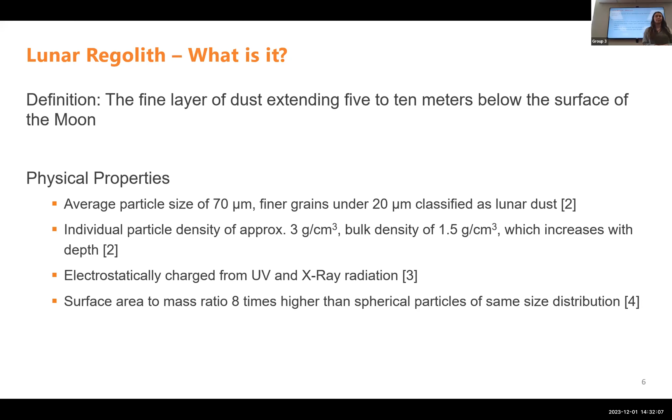There's many harms for the lunar dust and the lunar regolith that can be split into both human health hazards and mission and mechanical hazards. The human health hazards include watery eyes, decreased vision, cough and throat irritation, lunar dust embedded in the lungs, infections, heart failure, COPD, and lung cancer.

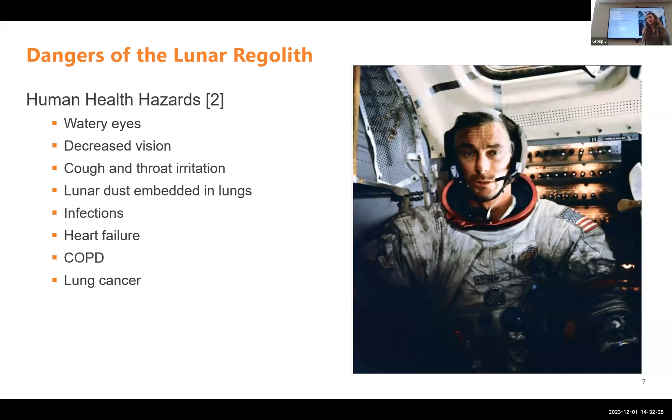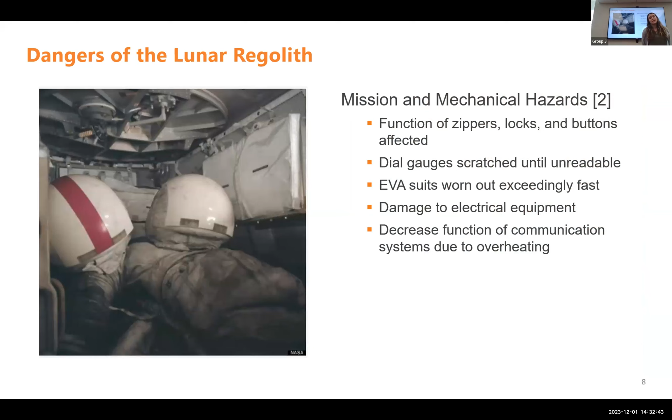The mission and mechanical hazards include functions of zippers, locks, buttons, all being affected, dial gauges scratched until unreadable, EVA suits worn out exceedingly fast, damage to electrical equipment, and decreased function of the communication systems due to overheating.

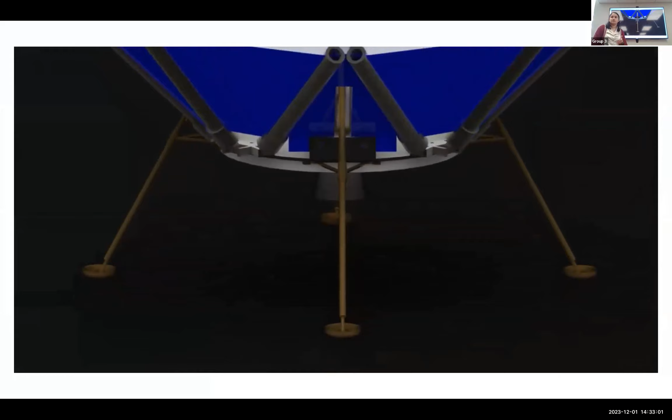So now we're going to go into our actual design. So this is presenting the dust shield integration system that we created, which is set to be, as we said, attached to the Blue Moon Lander. Upon expansion of the system, the shield is going to deter dust from falling on the lander and possibly causing extensive damages.

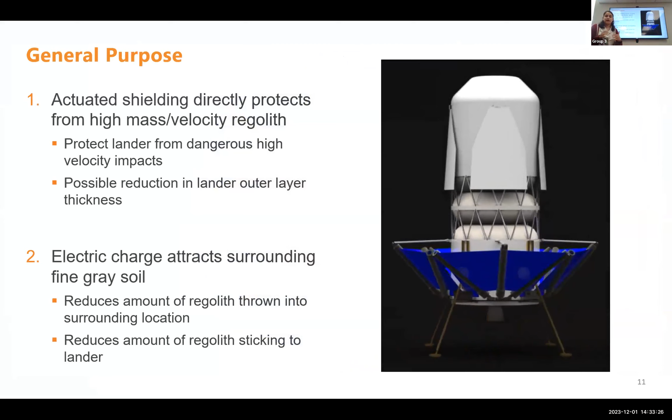So the shielding itself, which is indicated by the blue material, is made of carbon nanotubes that are going to protect the lunar lander from high velocity impacts from regolith. So likely things like rocks and smaller items.

So additionally, the electric charge in the electrodynamic shield, which is integrated within the system, is going to attract surrounding dust, which is going to reduce the amount of regolith thrown around on the landing site, which is going to help reduce contamination for the samples that are going to be collected later on.

Here we have a further breakdown of the different components. It's going to feature 4 linear actuators along with a series of beams and brackets, and the electrodynamic dust shield, or EDS as you'll hear us referring to it, which is integrated within the blue fabric.

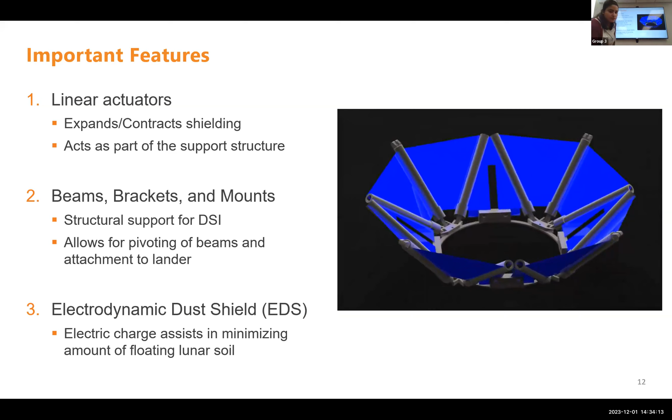And here, once again, is a further breakdown. We have the EDS fabric in blue, which is, like we said, the carbon fiber nanotubing netting, which has copper wiring embedded throughout. It's connected to the beams, and when the DSI contracts, it's going to fold up against the lander.

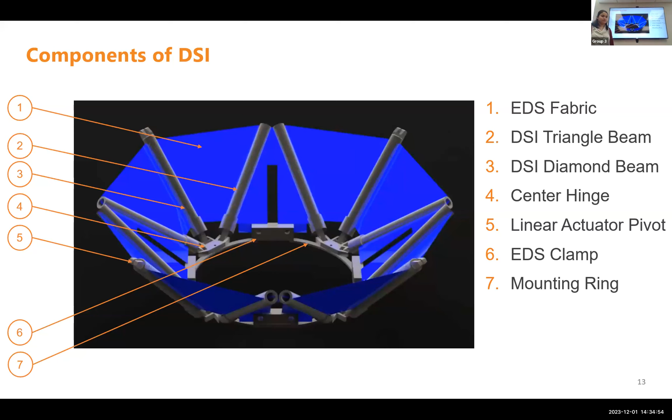We also have the different beams indicated by 2 and 3, which are the triangle beams and the diamond beams, along with these center hinges that will connect it to the main structure. We also have, indicated by number 5, the pivots where the linear actuators will be attached, along with several clamps that are going to hold onto the fabric to allow it to contract and expand.

So starting with the triangle and diamond arms, as Elizabeth said, these are our main structural members, and they are made of an aerospace grade titanium alloy that is known for being very light while still remaining very strong. And it was very important to have a very light material because of how large these beams are, being approximately 5.5 and 7 meters long, and with a 60 centimeter outer diameter and a 3 centimeter wall thickness.

And then next we have the linear actuator clevis mounts and tube couplings, which allow the arms to connect to the linear actuators and the hinge mount at the bottom. And they are made of a high strength steel alloy. So even though the steel is quite a bit heavier than other materials, it is very strong. And in our structural analysis, which we'll show later, we found that these were critical points of failure and potential points of failure in our design. So we went with steel, even though it was a bit heavier.

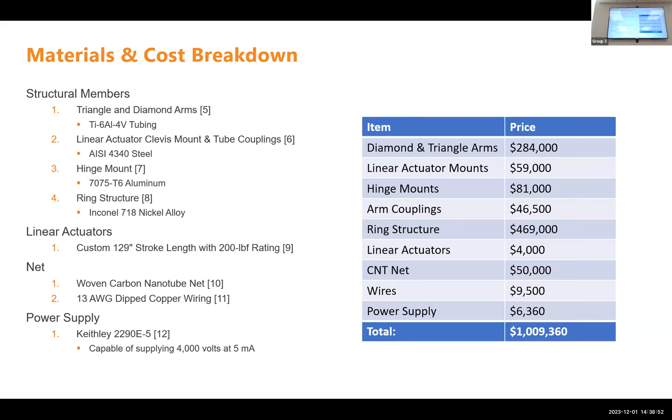Hi, my name is Benjamin Smith, and I'm going to walk us through a contextualization of our design. So first off, why did we choose the Blue Moon HLS? The primary reason for that is that it has a more typical lander design compared to our other option for this challenge, which was Starship. And our team felt that by choosing Blue Moon, we would have a much larger history of data to comb through, primarily the Apollo missions. And additionally, by making our design for a more typical lander design, it could be used on future landers if developed and improved upon.

And the second thing to contextualize is, why do we go with a combination of systems? And so when our team started our initial research, we quickly figured out that in order to have a more permanent solution for dealing with lunar regolith, it would likely require extra missions and a significantly higher cost in order to achieve that. And so we went with something that's more modifiable, something that can be attached to an already existing lander and be sent up there. And obviously it's more of a temporary solution, but we felt that that fit better within the parameters of the challenge itself.

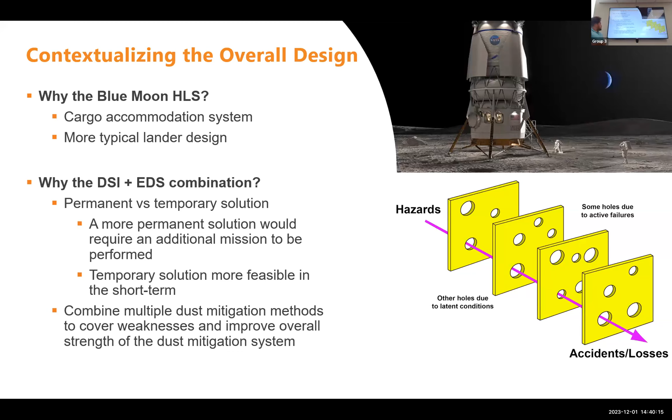And so why do we have this big shield here? Primarily the shield is an active method of dust mitigation. By deploying, it will help deflect dust that runs up and hits it. And additionally, we realized that with the shield, we won't have to worry about any flight characteristics being affected, due to the fact that we'll be in a vacuum when the lander is landing and ascending.

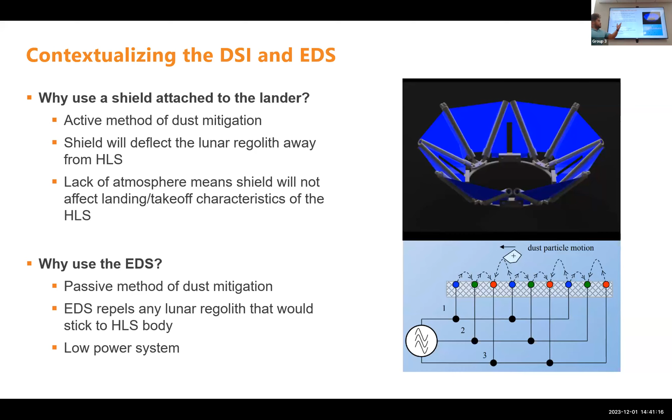And why did we choose the EDS? As a passive method of dust mitigation, we felt it was important to include, so that any dust that's not deflected by the shield would be able to be repelled off the surface of the lander itself. And additionally, it's a low power system, so it would not cause a massive strain on the HLS's current power setup. And we combine these systems together to cover their weaknesses and to improve their strengths.

Hi everyone, I'm Paul, and I'll be going over the astrodynamics of our mission. Our astrodynamics sequence is a simplified version of the one that will happen for the Artemis 3 mission in 2025. The sequence comprises 4 parts: the initial low Earth orbit around the Earth as a parking orbit, a translunar burn, an insertion orbit to enter the moon's gravity field, and then a rendezvous sequence to catch up with the HLS system that is already orbiting the moon.

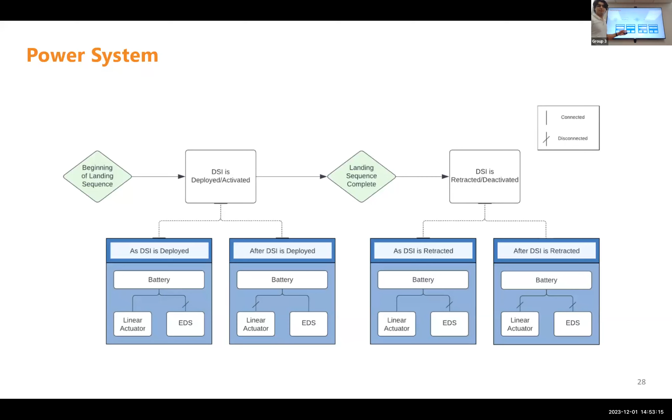To implement this PID controller with our linear actuators, we've chosen to go with the manual tuning method. It's intuitive and well suited for our relatively simple linear actuator mechanism. So first, we'll start by increasing our proportional gain for a fast rise time and controlled overshoot. And after that, we'll adjust our derivative gain to minimize overshoot and then our integral gain to minimize steady state error.

So moving specifically to our linear actuators, it's important to note that there's no computed torque control as these operate in a two-stage manner. And velocity inputs are unnecessary due to their simplicity. So instead, we'll rely solely on the encoder within the linear actuators for feedback control and utilize the position of the linear actuator mechanism.

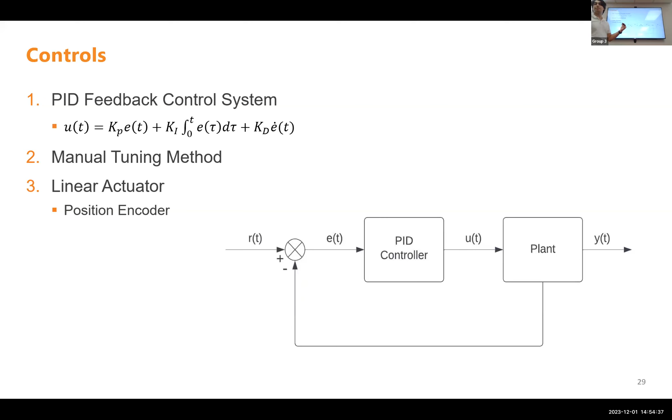All right, so I'm Rodrigo Pazanotto, and I'll be talking about the structural and thermal analysis of our design. So for the structural analysis, we decided to separate the system into three different critical components: the linear actuator, the shield arm hinge system, and also the mounting ring hinge system. Right here is the linear actuator, the shield arm, and the ring around.

And for the analysis, we decided to focus on the main concerns of our structural design and the material selection and the attachment methods. It's also good to mention that everything was vetted using hand calculations, and the overall factor of safety of all the three subsystems that we separated is around 1.93.

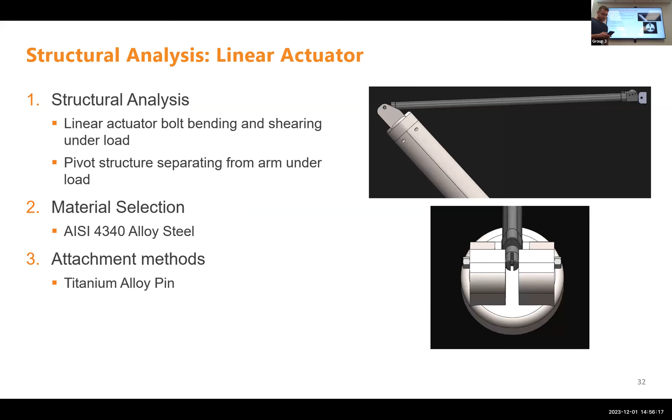But going for the linear actuator right now, our main concern was first the linear actuator bolt bending and shearing under load right here, and the pivot structure separating from the arm. These two brackets right here, as we see, and that's why, as Chase said, we chose a high strength alloy steel, stainless steel, and also we used the titanium alloy pin for this specific mounting bracket system.

What else? Okay, so now going for the shield arm hinge system. So the main concern here was the hinge system brackets breaking off the main hinge system right here. As you can see, we have the different brackets. That was one of our main concerns. The hinge pins, again, just like in the linear actuator, shearing from the weight of the arms, opening and closing, and the arm coupling detaching from the hinge coupling right here as well.

And for that, the material selection, as we said, I wanted to save some weight, and because these pins right here don't suffer as much as in the linear actuators, we're able to use aluminum alloy, and the factor of safety of this specific system is still at 2.4, so it's pretty safe. And for the attachment method, we decided to use plasma welding for those systems, and the titanium alloy pin again for the hinge systems, and the plasma welding just because it minimizes distortion, and it's just better overall when you're dealing with spacecraft components. And now for the mounting ring.

Okay, for the mounting ring, our main concern, since this is the part that's going to be connected to the HLS, is that we need to make sure that it's going to stay there. It's not going to fall off during a landing procedure. That's why we use the nickel alloy Inconel 718 for the material selection. As we said, our main concern is the detachment of the hinge system via the breaking off of the mounting ring and/or the HLS as well. And the attachment method also is the plasma welding.

And he's got another question. Oh, sorry. Just wanna let you know, I'm pulling up the slide that has it attached to the lander just to make that a bit clearer. Yeah.

So while she's trying to find that, we're trying to help protect the lander from any displaced plumage that will be displaced by the engine. And then additionally, having the shield at this angle should have any deflected plumage go up a bit. So if there are any structures nearby, then ideally the plumage won't be hitting it directly. It may just fall on it, which isn't as big of an issue considering the low gravity environment.

It should also be noted that the physical shield itself is meant to block the larger regolith, while the EDS that is integrated within it is what's going to protect from the smaller plume that'll be appearing during the landing. I hope that answered your question. So how effective will this be?

That's a great question. So we designed the shield around the idea. The number we had for the HLS was that it had a base diameter at the bottom here of about 8 meters, and so we wanted to have a protective area go out to 16 meters, so basically double that. That's why the size of the shield is pretty large, and I would say this should be fairly effective. I'm saying that with 50% confidence.

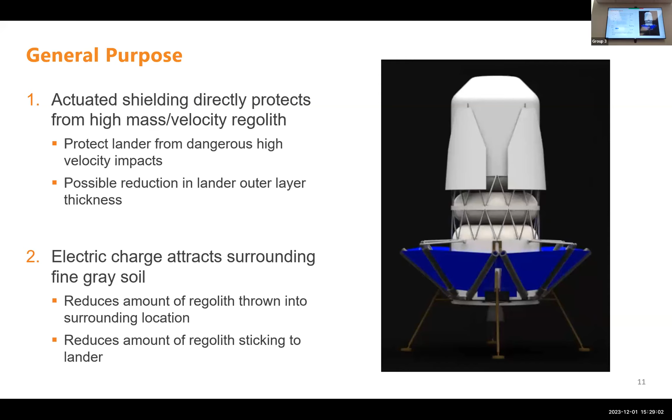Can you swap it, CFD? Yeah, and on top of that, we wanted to give the full picture because the actual point the lander will be coming in from, with regards to its position on the moon, is going to be part of the transfers, and so we may have been a bit too detailed showing the Earth transfers too, but we felt that it was good to be very thorough.

So this CFD was modeling the BE-7 engine, and the CFD graph in the middle is the Mach number, and this bottom one is the velocity. And so this CFD was set up. Oh, okay.

We set up the CFD to simulate a low pressure environment. Typically if you do CFD for a half rocket, doing a half nozzle, since you can just mirror it, you'll have some ambient pressure here, and then you'll get a couple shock diamonds. But since we're in space, we set it up to have a very low ambient pressure, and what we see from the results is that there's no shock diamonds.

Why do we do CFD analysis? We did the CFD analysis to get an idea of the characteristics of the engine exhaust, because those characteristics would impact how the lunar regolith would behave. Yeah, and if you want to.

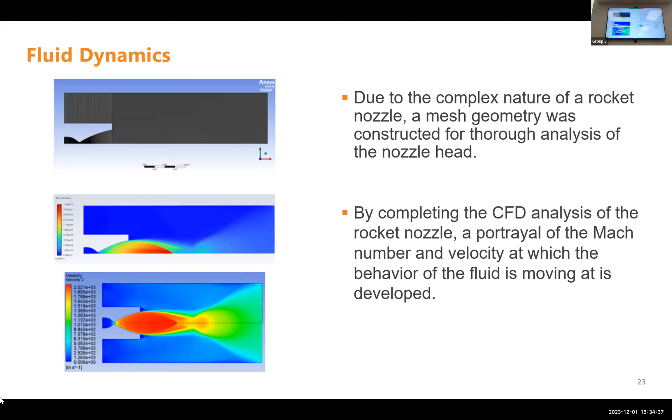I think the propulsion system is something we should have elaborated more on within our slides, but understanding the plume effects, and essentially how far these plume effects would start affecting the lunar regolith, is also what determined at what altitude we would be deploying. It's fair for you to say that. We should have included exactly how it tied in, but essentially understanding the propulsion system, using the CFD and understanding the plume effects, is how we decided the altitude. We just didn't make that clear.

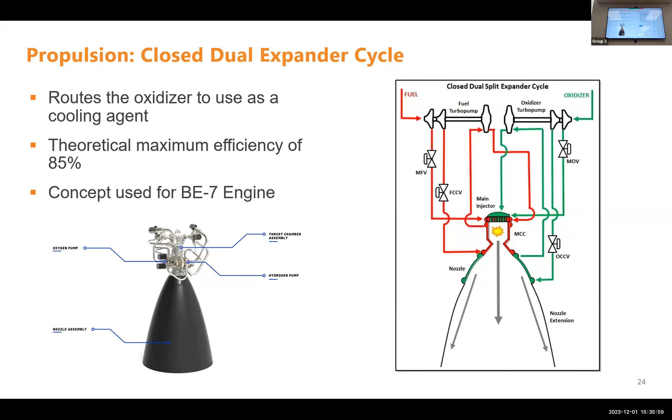Also, on that note, something we should have done as well: we only analyzed one engine for the design, when realistically we should have done the three engine analysis, because that would have been very impactful and helpful for our design. Due to pressure differential, correct. Yeah, when it lands.

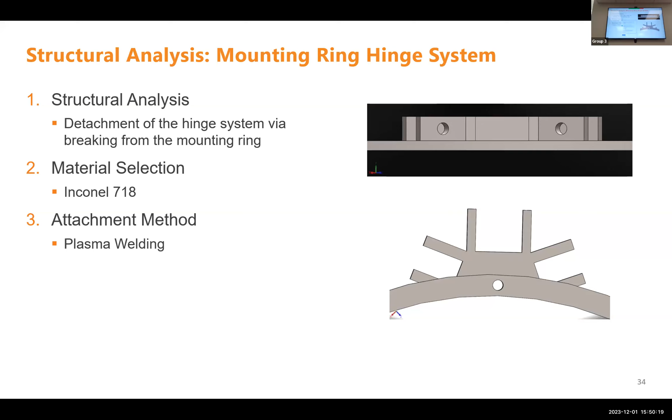No. Wait. Go to that slide. Can you get it? It's this one, sorry. Let's see if I can find it. It should be cited in the PowerPoint. No, in the report. Which report? Body structural. Oh, I have it. Using the attachment methods. What are you?

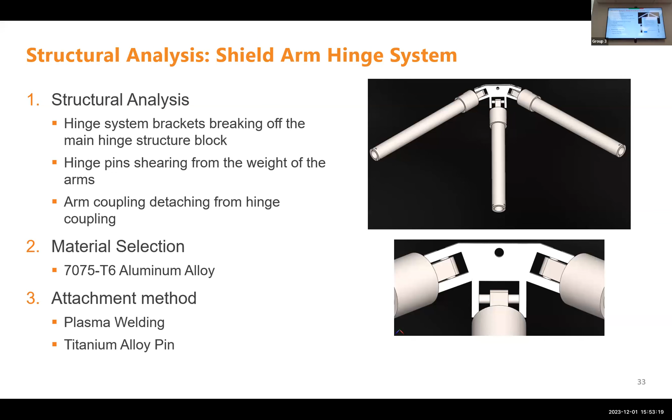Yes, from what I see here, plasma and TIG welding will be feasible to perform with the aluminum alloy and the Inconel as well. Both plasma and TIG again. Oh yes, that's what I meant. From our research, at least. Citation. These kinds of welding can even be completed in space. It's called Welding for Space Travel, the Ultimate Challenge.